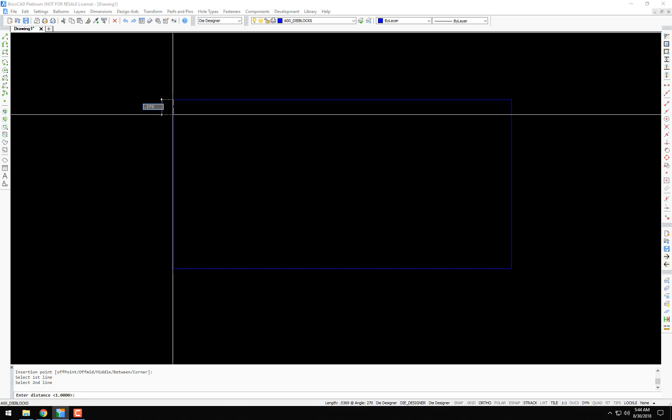We'll go with the 3/8 16, and let's say they're 2 1/4 long, and they will be from the bottom. Click OK, and I am going to snap off the corner, and that'll be 0.375 off the corner. Now I can type SH again to start the socket head command, which I will do, and I'll go into the corner, snap.

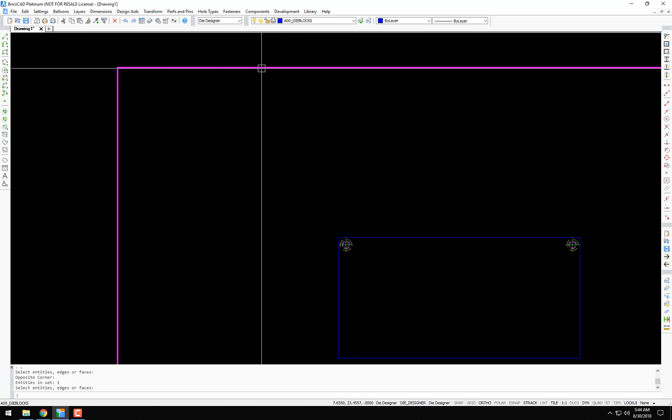I can also use a die designer feature called touch, and if it's just this simple line, I can touch on that line and it starts the line command on that particular layer. So if I touched on this magenta polyline, it would start drawing polylines on that layer. But it also works for components too.

So I can click on this socket head cap screw, hit C for corner, and pop it in there. Restart the command, corner. We'll put a couple off the middle, 1 inch, 1 inch. Okay, let's put a couple dowel pins in there.

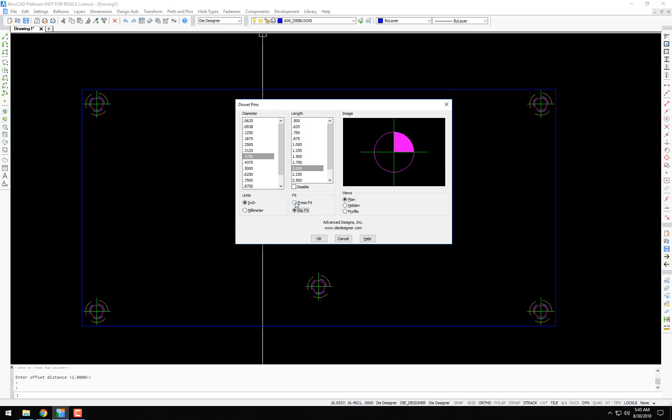If you'll notice, you can access everything through the menu system, but most of these tools I have up in the menus have 1, 2, or 3 letter keyboard commands, so I could just type DO at the keyboard, which actually is quicker to do some of this stuff. And I'm going to put in this default plan view, but we have hidden views, we have profile views, we have a slip fit dowel as opposed to the press fit, and certainly millimeters also.

So I'll put this press fit in the plan view in. I am going to put it off point. So I'm going to select for the starting point to put it off of the center of that socket head cap screw, the direction, 0.750, and there we go.

Now I'm going to start this dowel command again, and I'm going to use it with the touch command just by putting the cursor over it and hitting a mouse button. Again, I'm going to go off point, off the center point, and let's go 0.800 to add some foolproofing.

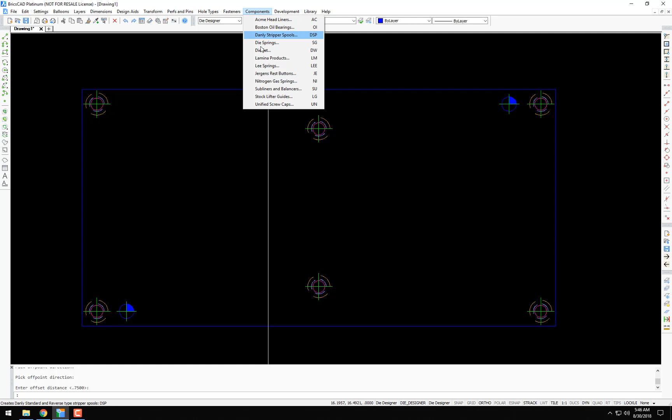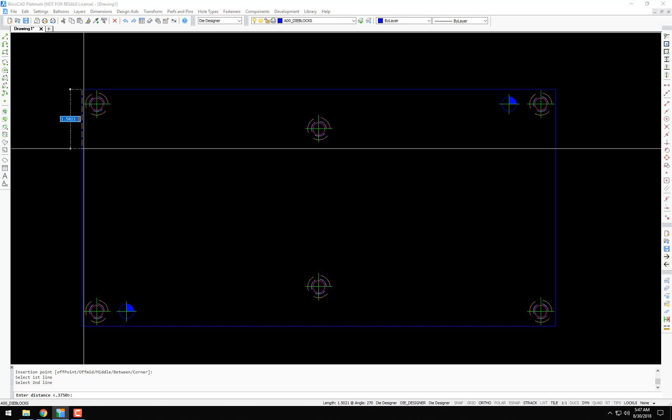Components. Let's put in a lamina bushing. There's a lot of different stuff, Agathon bushings and Misumi pins and bushings, but we'll just throw this lamina bushing in, and we are going to go off the corner, 1 inch. I'll just use the touch command to start that again, put it off the corner, corner.

Corner, move these out, 1 inch, 1 inch, move this one back 0.250, so we have a little foolproofing going on.

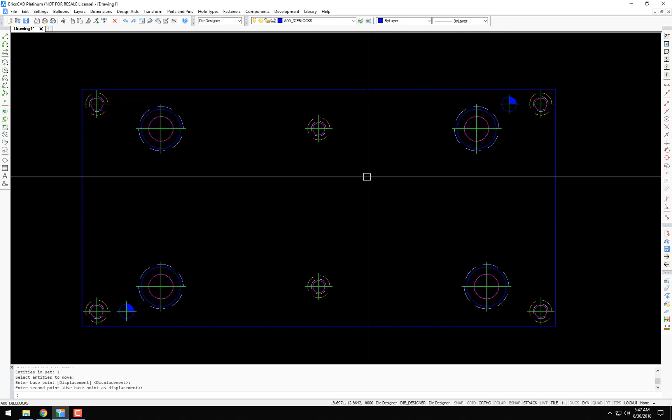Let's add another component. Let's add a die bushing, and we will use this Dayton VRR round with M2, and we'll put it in the plan view. I'm going to keep all this default stuff that just showed up. It just comes up with last use 125 slug diameter, 375 outside, and a 1-inch length. So that would be a 1-inch for a 1-inch die block.

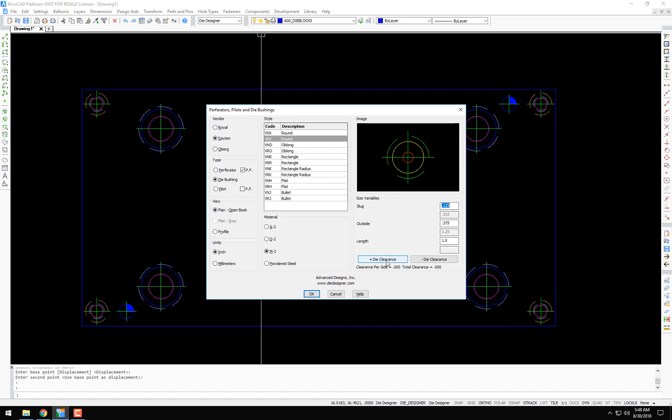So I will pop that in, and I am going to put that off middle, and we'll say by 1 inch. I'm going to zoom into this area. Before I do the next thing, let's set a progression on this, and let's call the progression 1 inch.

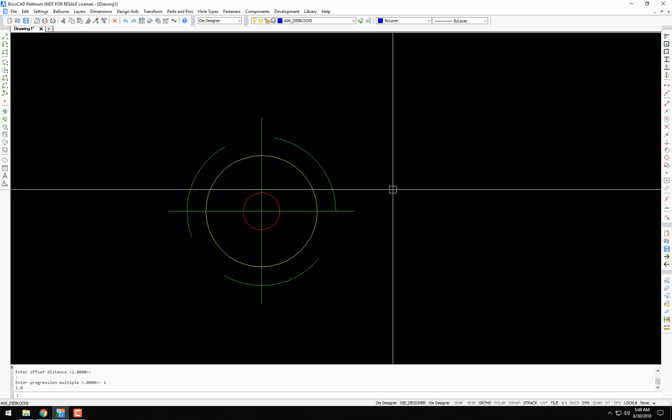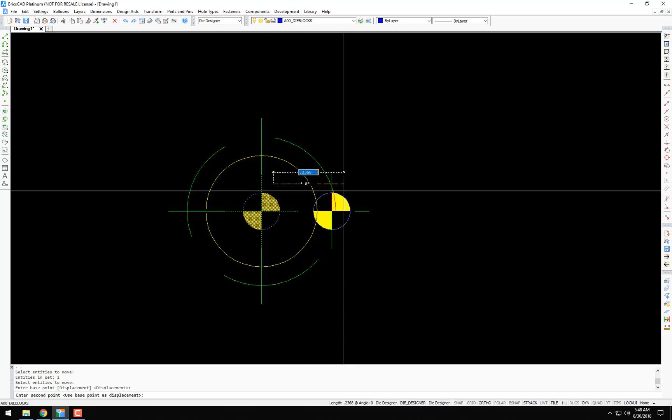I am going to go to hole types, and I'm going to go to pilot holes, or PO. I'm going to snap to the center, and we'll make the pilot hole the same diameter as the slug opening of 0.125. I will move that, the 1-inch progression, and now I will go to design aids, and I will scroll down to array progression right, select that pilot hole, and let's say 10 progressions.

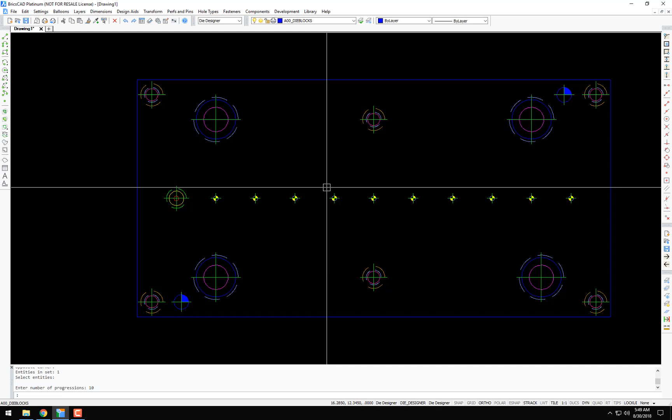Let's see how this fits on the die block. Fits pretty good. So yeah, I'm going to quickly draw a rail.

So I switch to the rail layer and start the line command. Like I said, I don't even have a strip on here yet, I'm just drawing components, so bear with me. We'll move the rail up, say 0.5.

Let's see what we can get in here. Let's make it a 1-inch rail, and let's make the hook under the rail 0.65. Change the layer of that to hidden.

Quick stretch. A little chamfering. Little stretch. Okay, we got a rail in.

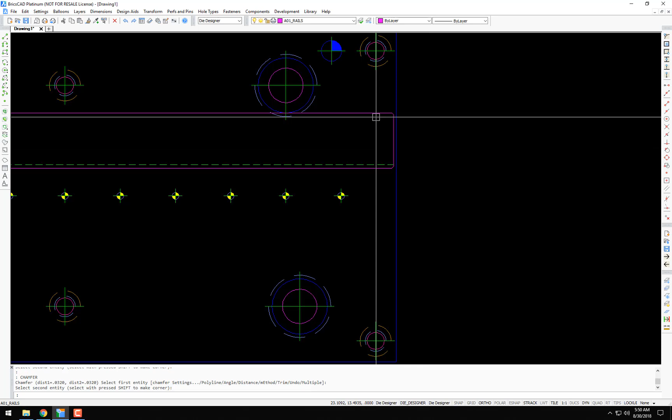Let's put a couple screws in this. Let's use flatheads this time, or low heads rather, and we will use the 10-32. And I will put this in the corner. And let's go with the 0.375.

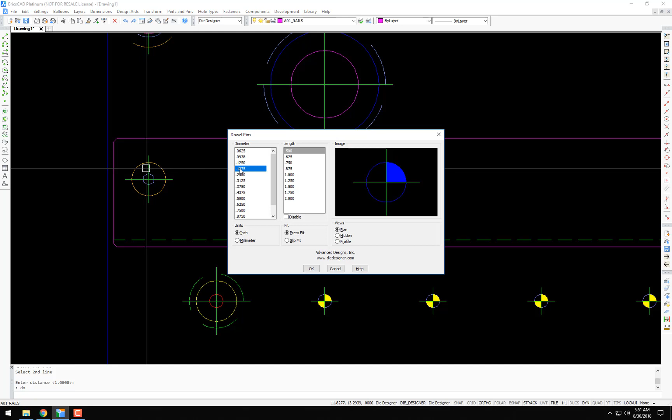Let's put a dowel in here. Let's go with the 3/16. Let's go off point, off the center point by 1/2 inch. Off the middle. Corner.

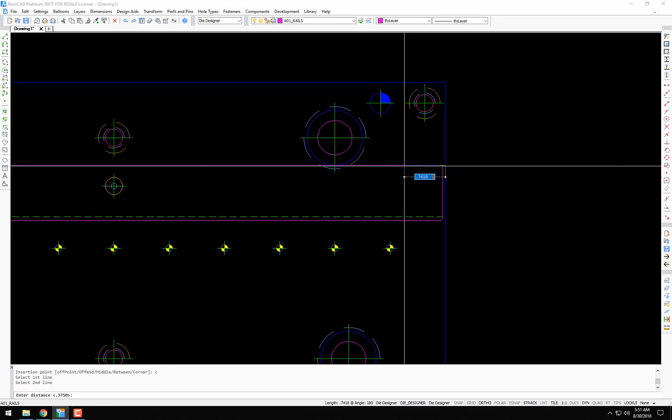Another dowel, we'll put that off point. And let's put, let's say 2 inches, 2 inches. Erase that.

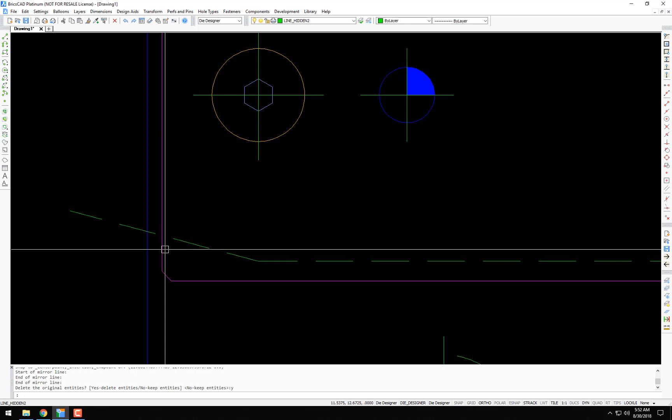Put a little lead-in on the rail. Rotated it the wrong way. Okay, let's mirror this down so we have 2 rails.

Okay, so we basically got a die block. Just in visualizing this, we have a die block. I am going to have a backup plate beneath this. I am now going to put a die set around this.

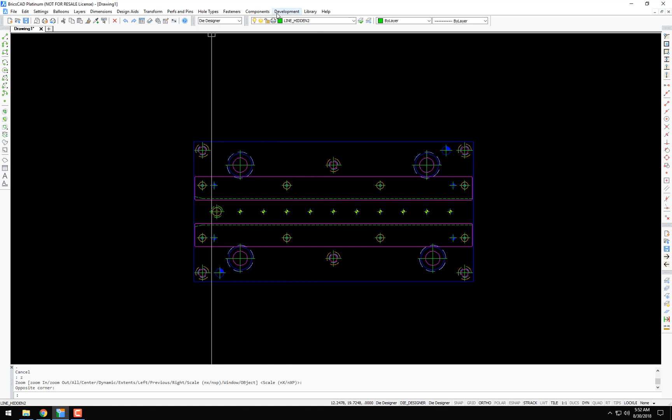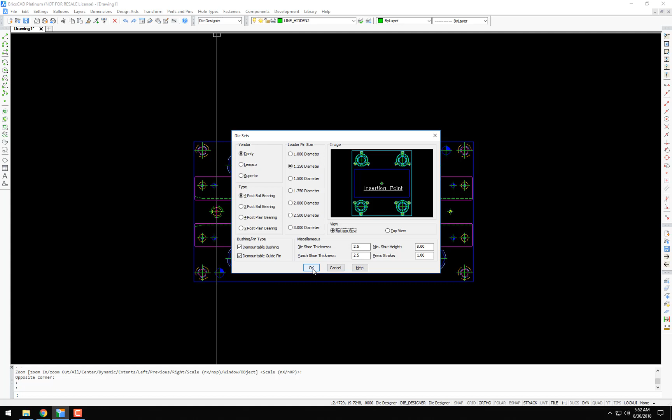So we'll go to components, die set. We're going to go with this Danly 4-post ball bearing with demountable bushings, demountable guide pins, and we're working on the bottom view, so we'll stay with that bottom view. I'll keep these default settings, these last used settings, but they can be whatever you want them to be. And we'll click OK. Now I'm going to insert it into the middle of this yoke.

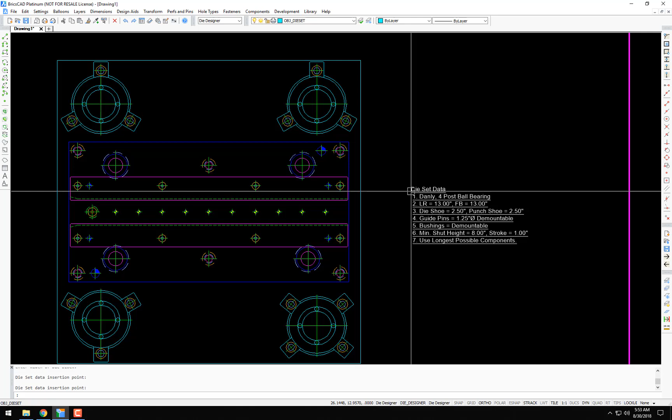So we can get some die set size. It's prompting me to enter the length and now the width, and as soon as I click this, it's going to draw the die set, so it'll happen pretty quick. And then it prompts me for a place to put the die set data, and I'll just put it over here to the right of the die set.

Okay, I'm going to draw a couple balloons, a couple leader balloons. I'll mirror this down, and I'm just using these as reference lines, but I'm going to do a little bit of ballooning, and I am going to use the split leader balloons LB. First balloon is 1, and I will select the die shoe.

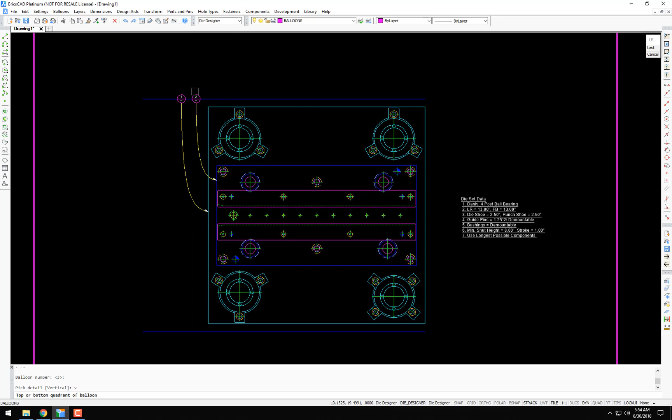Next balloon will be the die yoke. Next balloon, and I'm going to use the vertical option, so I'll select the top quadrant, and this will signify the backup plate beneath that die yoke. Okay, next balloon is 4. I'll select this rail.

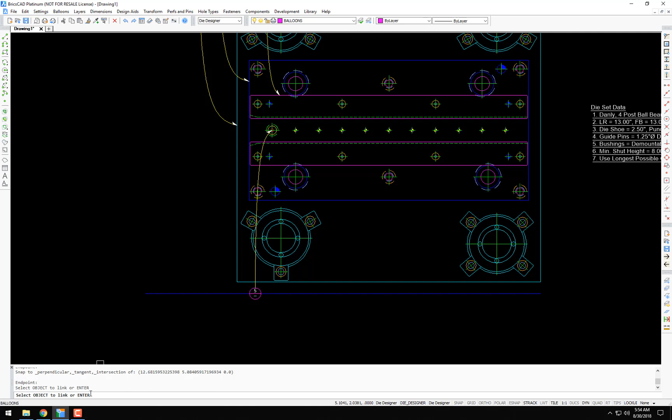And now let's go to the underneath side and finish this up. Balloon number 5 will be this Dayton die bushing. Now you'll see down in the command prompt area there's select object to link or enter, and all I have been doing to this point is entering, but this object has bill of materials information into it, so I will link it to the leader balloon just by selecting it.

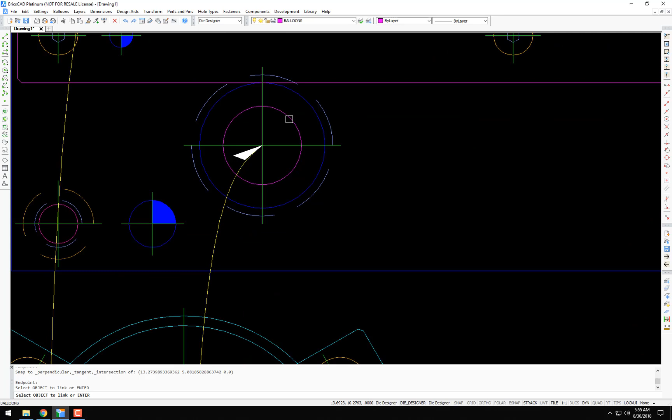Also, this Lamina bushing has linkable objects information for the bill of materials, so I will select that. And finally, the guide bushing for the die set has the same thing, so I'll snap to that, draw my balloon, and then select it to link. I will erase these lines, and I am going to pause this video at this time.

The next video up, we will start detailing. You'll see the automatic dimensioning, you'll see the hole charting, you'll see the bill of materials, which is automatic, and then the Excel spreadsheet. So some really neat stuff on this next one.